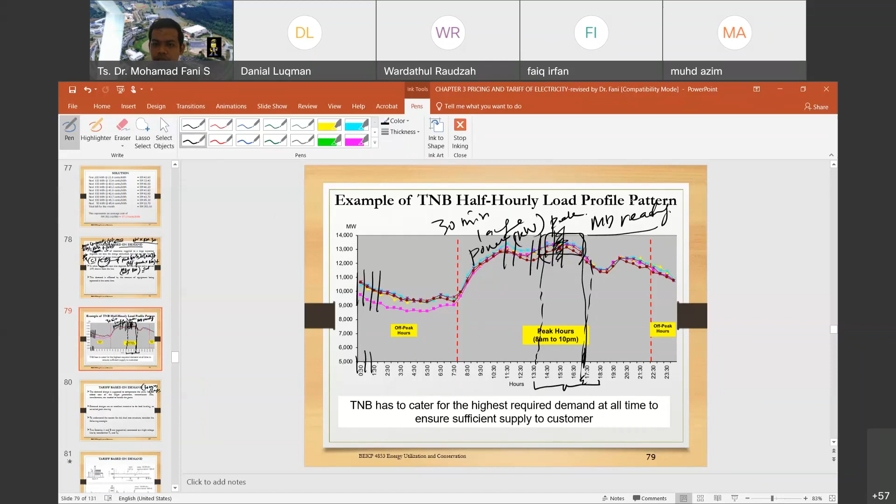So demand charge is an excellent incentive to do the load leveling, or so-called peak shaving, and will be one of the price signals from the utility to the consumer. So the utility will offer some kind of demand incentive if the consumer can reduce the maximum demand.

So the strategy so-called peak shaving is introduced by many practitioners in the industry, and also you can find it throughout the papers or research journals around the world. So they use peak shaving and also peak clipping, okay, peak clipping, to mitigate the maximum demand

value, the maximum value. For example, here we have something like this, 24 hours, okay. So this one is the area for peak. So on how to reduce this peak demand, there are many initiatives that you can do. For example, if this area is within the lunch hour, you can put a strategy to reduce the maximum demand during this lunch hour.

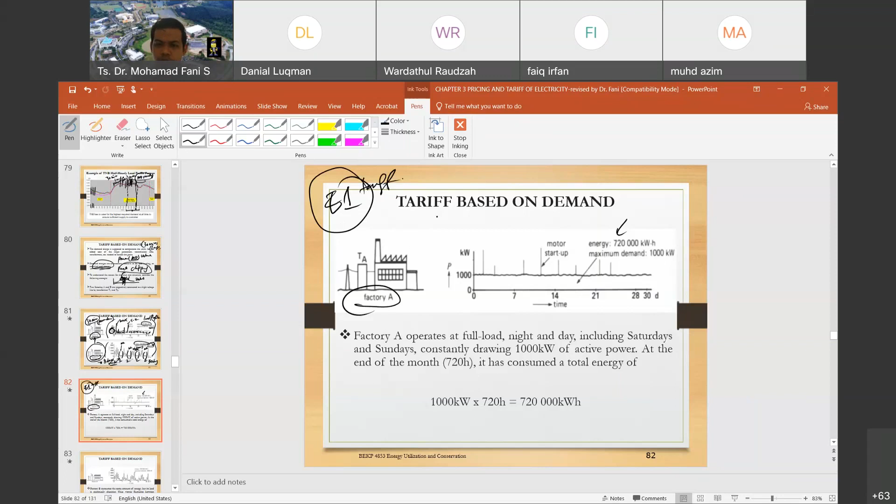So by this way, this one is how they get the kilowatt hour for factory A, okay. So let's calculate the tariff for factory A. Let's consider that factory A uses the E1 tariff. So what's the electricity cost for factory A?

So let's refer to yesterday. I did mention the many types of tariffs. So you can refer to E1. So E1, what's the price for the maximum demand?

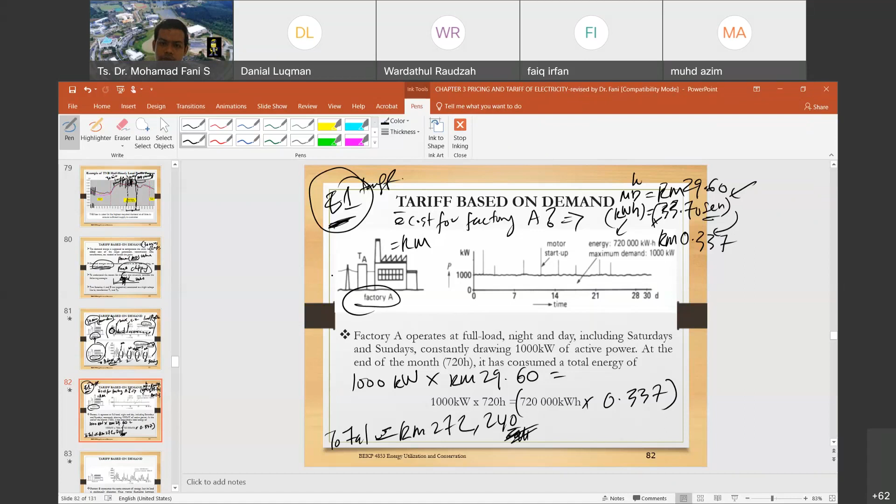So let's consider the tariff for factory B using E1 as well. Calculate 720,000 kilowatt hour multiply with RM0.337. This one is for energy consumption, and for maximum demand 3000.

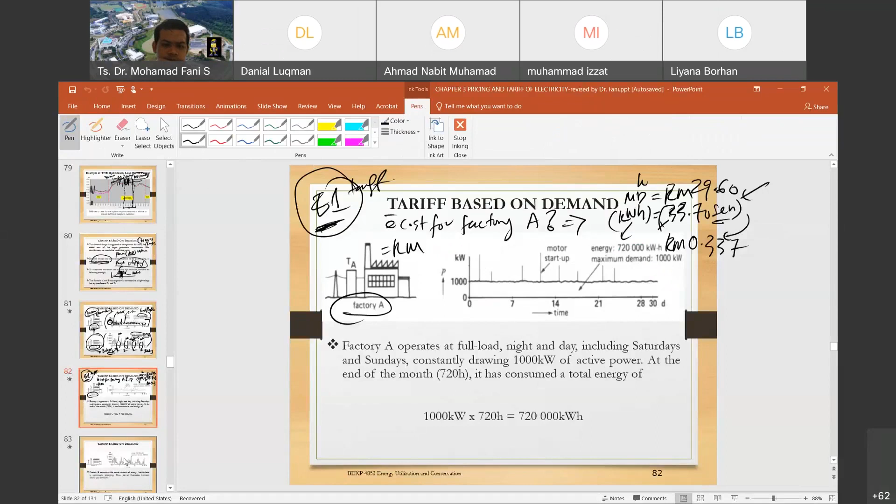Factory B, how much? This one multiply with 0.337. This one 29.60 RM. So plus both of them, you get the final RM how much? 331,440. This one is the total bill if they use the E1 tariff.

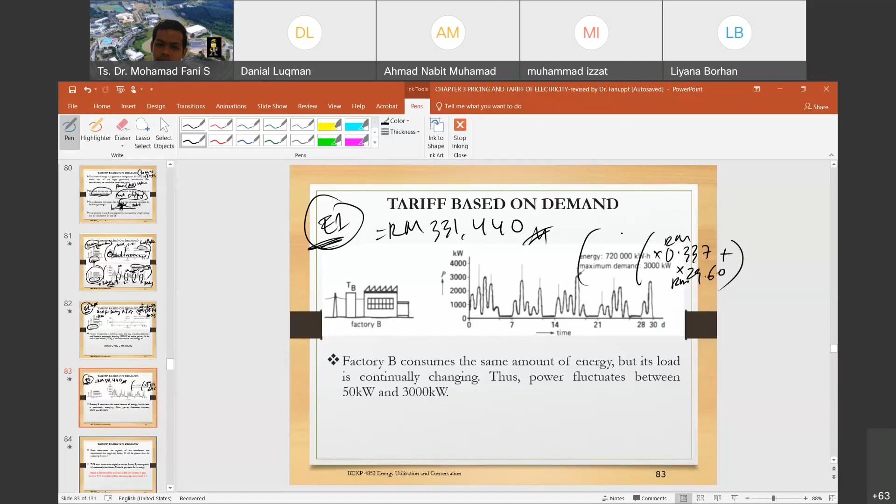So we know that when the maximum demand is higher, it reflects in a higher total energy cost for the monthly electricity bill. So when factory B is compared to factory A, we know that factory B consumes the same energy but a different amount of maximum demand, and factory B's electricity cost is higher compared to factory A. Okay.

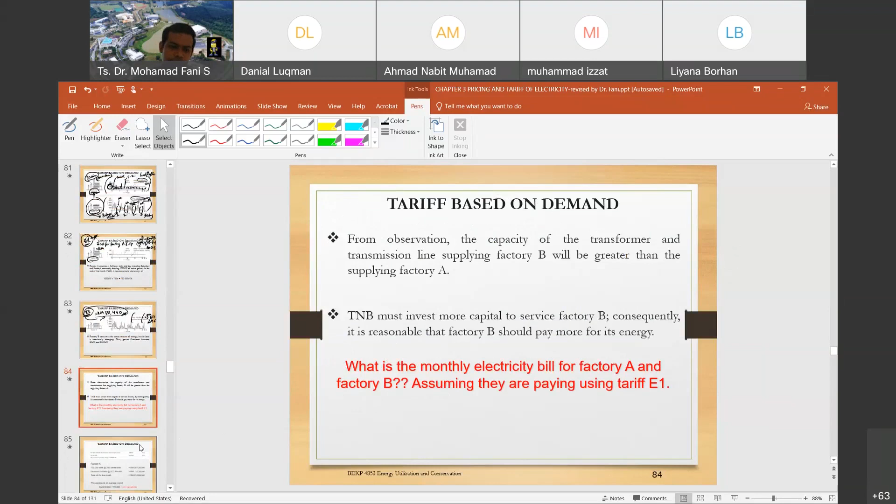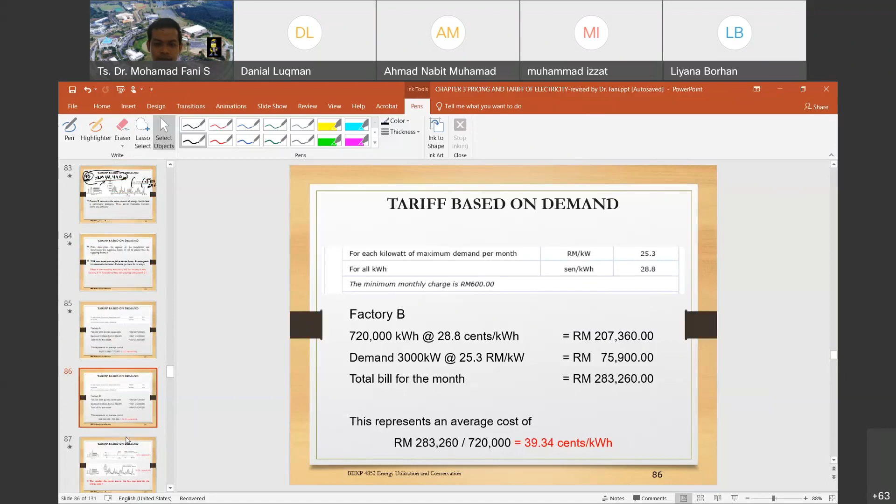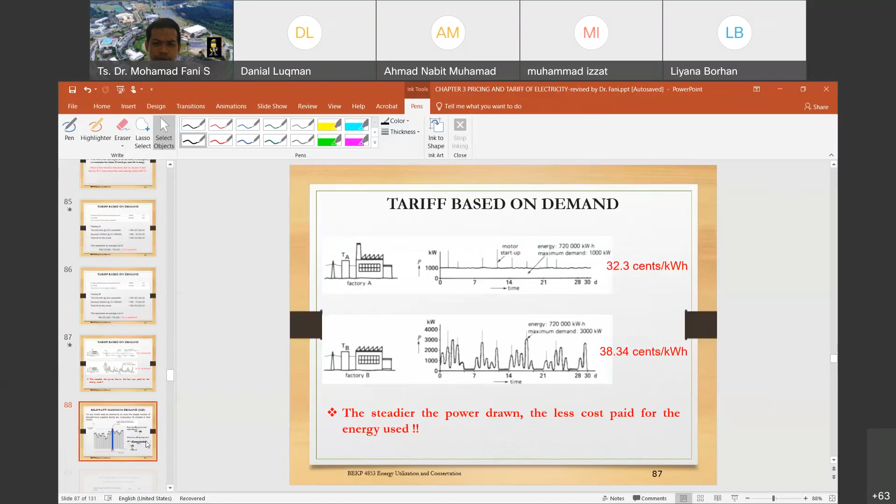One, you can consider peak demand for the fluctuating one, okay, that is less than 30 minutes, but the large number of the power used within the 30 minutes or consecutive 30 minutes, okay, that one we can consider as the maximum demand.

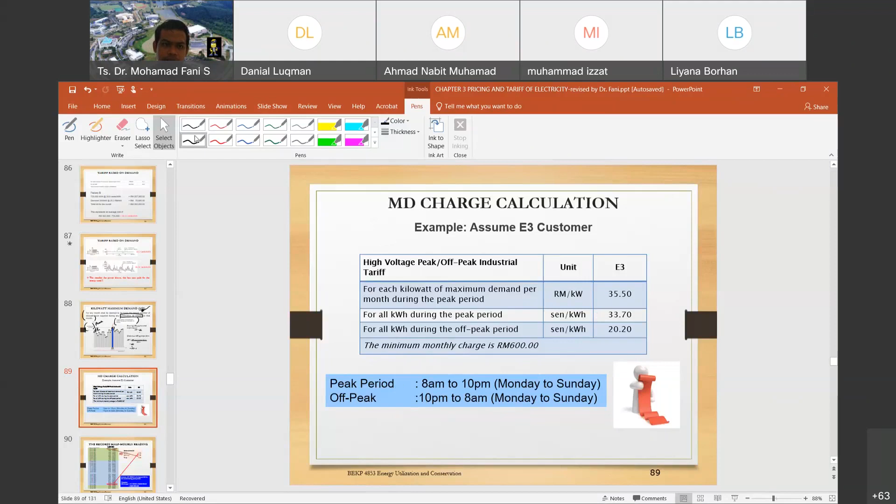Okay, maximum demand calculation for this one, E3, that uses E3, okay, the peak period. This one is the case example. Assume E3 customer. Okay, this one is the January load profile, 2nd January, okay, for 1 day. 1 day or 24 hours.

So we assume that this value, the top value of the power demand here is 71,700 kilowatt. Is the highest MD for the month during the peak period. Even though we found that the highest power drawn in these 24 hours by this manufacturing is 73,370 kilowatt, we cannot consider it to be maximum demand. Okay, the maximum demand will be picked up from the peak period only.

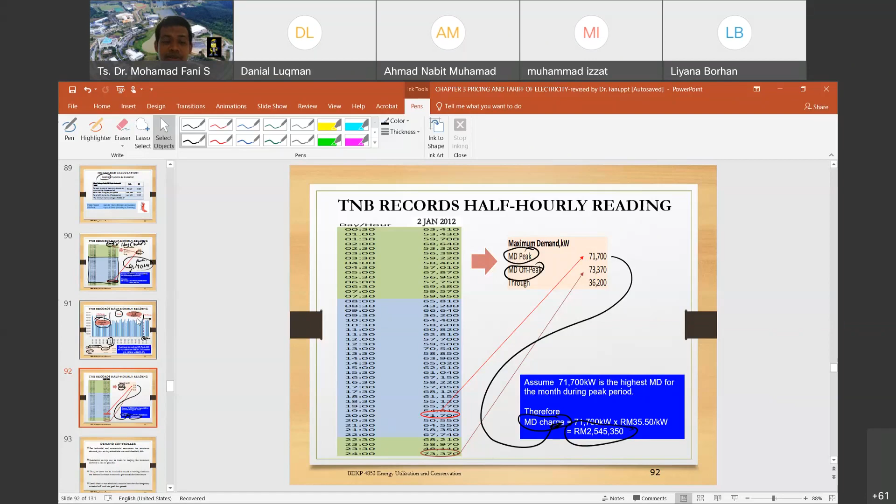And from my experience, I got to deal with a large manufacturer, a solar panel producer. They consume energy in large amounts, and their monthly electricity bill, if I'm not mistaken, was close to 10 million every month. 10 million, you know, can you imagine the large operation costs to maintain the manufacturing? And of course, I believe that their profit is also very large to cover their operation.

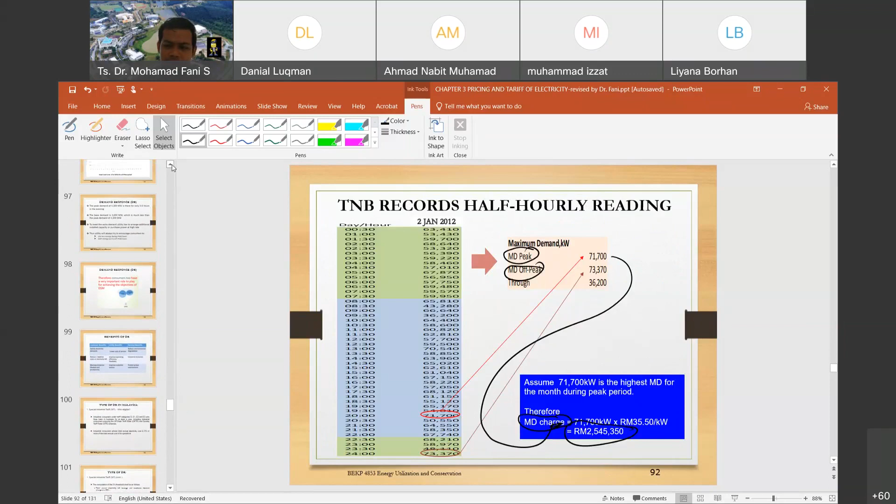Okay, demand control. So what we can do to control the demand, maybe you can have some idea on how to sustain the energy consumption by applying energy efficient appliances or solutions. And also for the maximum demand, frequently in industry, they monitor the demand as well, to lower down the maximum demand. For example, an alarm can be installed to sound a warning whenever the demand is about to exceed a pre-established maximum demand.

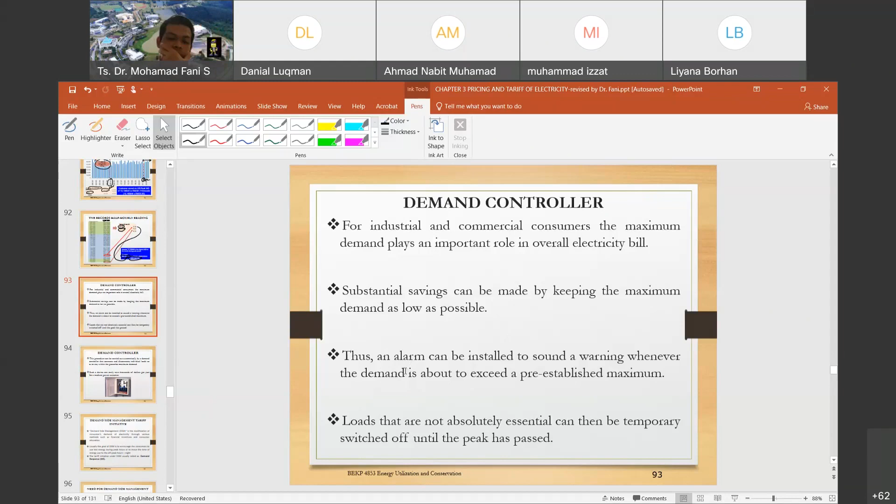From the building management system or building automation system, you can put some kind of indicator to monitor the maximum demand. Okay, for example, you can put a controller to prompt the alarm when it is close to the set point of the maximum demand. For example, 10,000 kilowatt you set as the set point. Okay, so when the load or power you use gets close to 10,000 kilowatt, for example.

So an alarm, the sound of an alarm, will be prompted from that system. So the operator will know, okay, something is wrong with the load right now, and must do something with the operation. So you can manage to look around the operation, okay, and to have some idea what kind of machineries or devices really need to be shut down during that time.

So that's good to monitor, and maybe you can have some idea later on, okay, to do a research, or to produce another technology that easily controls the maximum demand without disturbing the operation. That one is really important to avoid disturbing the operation to produce the output, and to optimize the operation within the limitation of maximum demand.

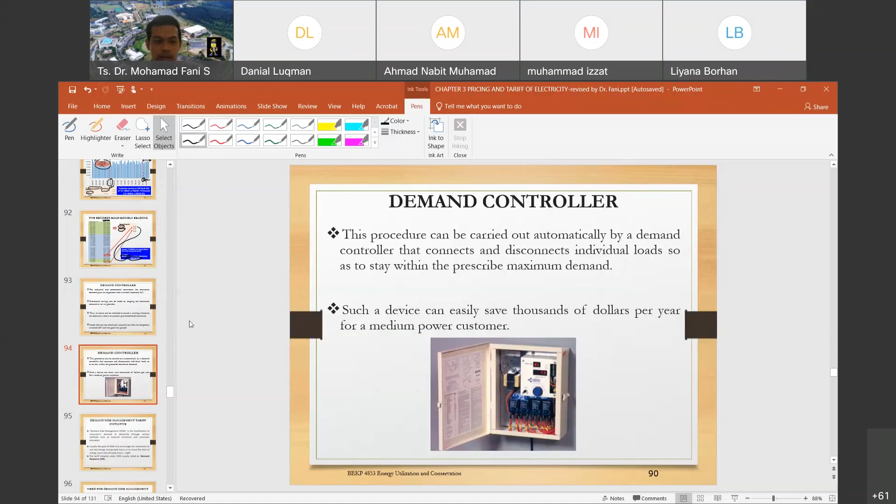Okay, any question before we proceed to the other subtopic, which is demand side management tariff initiative? So hopefully we have covered some topics which are really important on how to calculate the tariff. At least you know the type of tariff and you know how to calculate the total bill from the energy profile, pattern, and also the consideration for the maximum demand.

Any question before we proceed to this other topic in class? No question. Can we proceed? Okay, thank you for your response.

All right, so what is demand side management tariff initiative? Okay, so forget about maximum demand. This one does not really mean the maximum demand just now, but demand side management is the composition of energy efficiency and demand response, which is the program provided to the consumer, for example, to reduce electricity consumption and also to mitigate the peak demand, purposely to reduce the stress on the generation side.

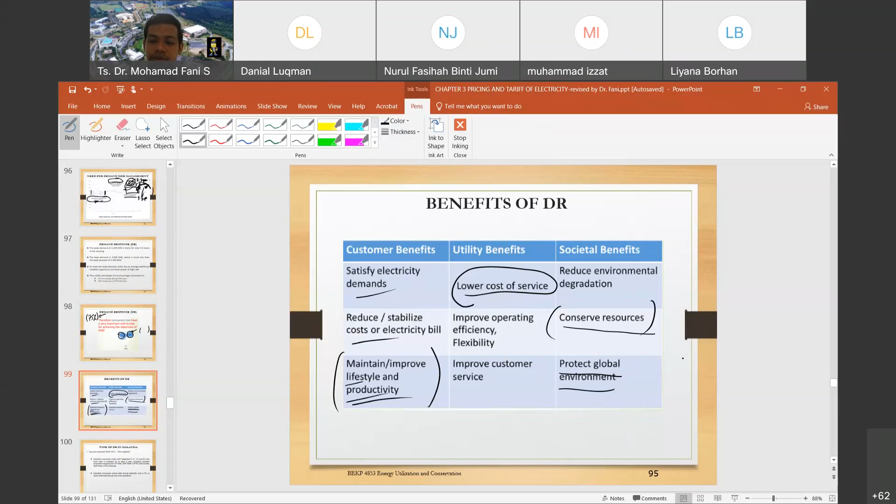So most of the economy, I think, will be established based on this policy later on, and to be a competitor, you need to have better technology and a better price. Reuters also reported that 80% of the solar panels in the US nowadays come from ASEAN countries, and we are one of the largest exporters to the US from many manufacturers here. I think because of the manpower cost, etc., the providers from the US cannot compete with China's products and ASEAN products. So we can produce solar panels at a cheaper price and export to the US as well.

Okay, so about 80% of solar panels installed in the US came from China and also from the ASEAN countries. So the tariff or tax will be revised by the US government. So let us see how this problem will be solved by agreement, the US and China agreement, and also the ASEAN to US agreement. All right.

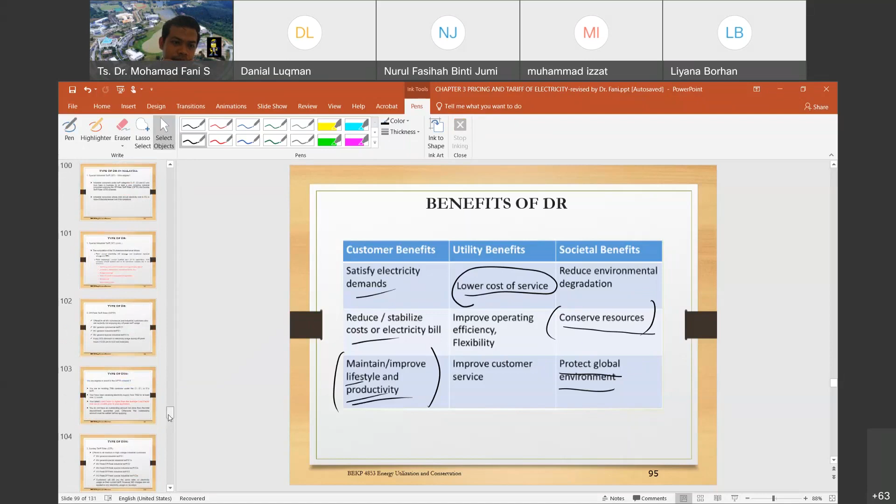Okay, type of DR, this one SIT. SIT dah tak ada. Okay, so do not focus on SIT, but we have OPTR and standard tariff, special industrial tariff, SIT dah tak ada.

Okay, so for the previous one, SIT was introduced to the large power consumer. The process to apply for the SIT, you need to have a good practice for the energy management: to provide energy policy, to appoint the energy manager, and to set the objective for the energy management.

So there were several types of operation that can apply for SIT, and they can have a discount of up to 5% every month for the electricity. This SIT program was stopped by the government for the last 5 years. Okay, industrial consumer, also we have OPTR and also STR, Sunday Tariff Rider.

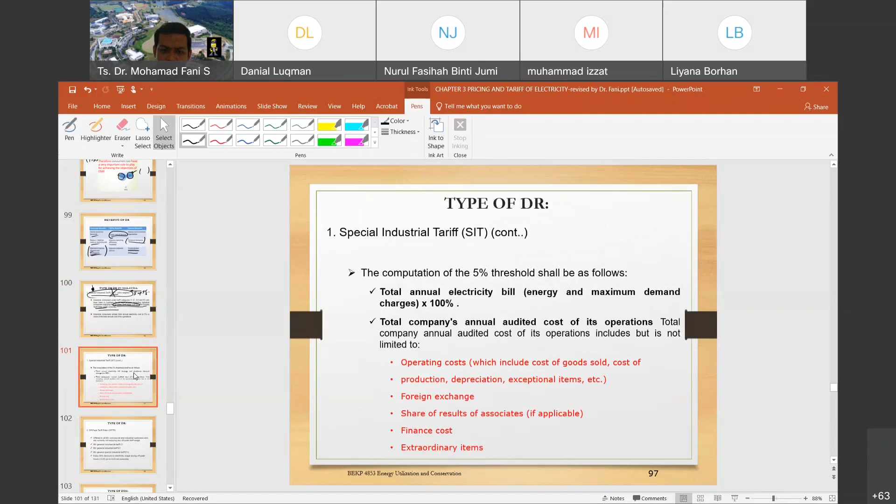Now, this one OPTR, off-peak tariff rider, offered to the MV medium voltage, C1, E1. TNB offers you can enjoy 20% discount on the electricity usage during the off-peak hours from 10 p.m. to 8 a.m. every day if you are able to improve

the point of TNB offering this OPTR, you need to improve the load factor. So you are eligible to enroll in the OPTR if you are a TNB consumer C1, E1, and you have been receiving electricity supply for at least 1 month, and your latest load factor is higher than the average load factor over 6 months prior to the application.

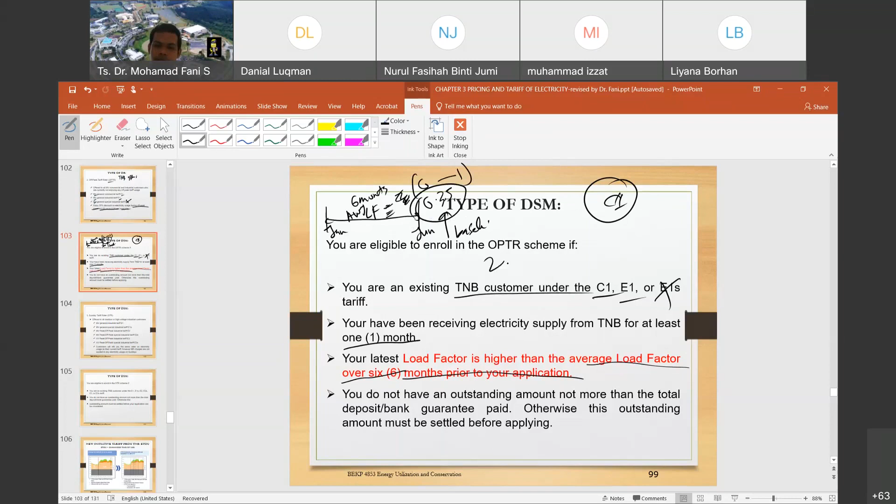So in order to enjoy the 20% discount, you need to improve your load factor. For example, this one is the average load factor given by TNB, and you need to improve this load factor for that month, and you can get the 20% discount for the off-peak during 10 p.m. to 8 a.m. So what's the value? The value of the load factor must be more than 0.35.

So that means you need to have a good consideration for the maximum demand and the energy consumption. So what's meant by the consideration of load factor? This one is the formula for load factor.

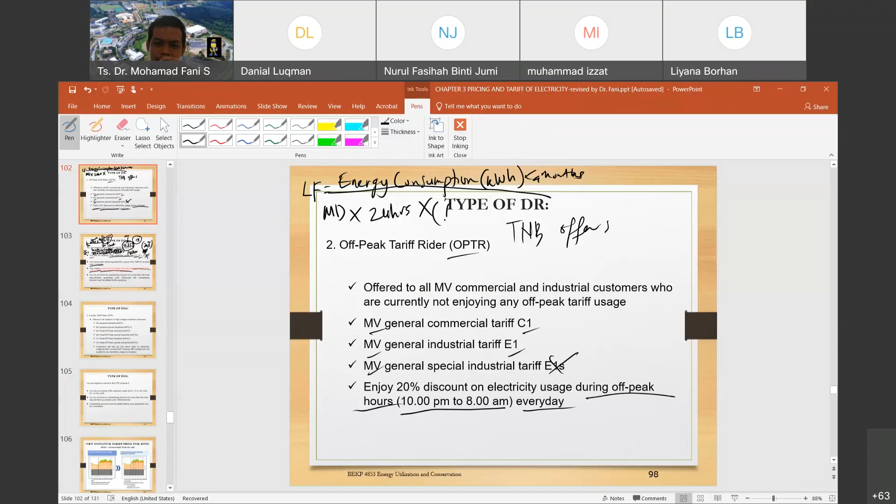Okay, multiply with the hours, 24 hours, multiply with the days in a month. Kalau 30 lah. Kalau Februari 28, consider 28. So this one is the load factor.

So on how to improve the load factor, you can see here. You can maintain the energy consumption, but you need to lower down the value of the maximum demand, so you can improve the load factor. Or you install something to reduce the energy consumption, so your energy consumption reduces, and you need to reduce the maximum demand as well, to balance the consumption and the maximum demand, and of course you can improve the load factor.

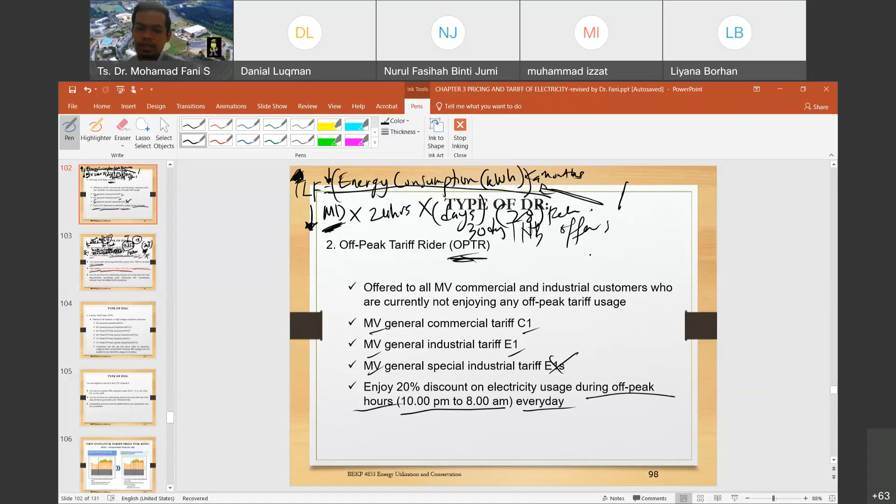So to enjoy the OPTR program, you need to improve the load factor. Every month, TNB will provide you the load factor value from the baseline. If you're able to improve from 0.35 and above, you can enjoy the 20% discount for the off-peak period. Any question?

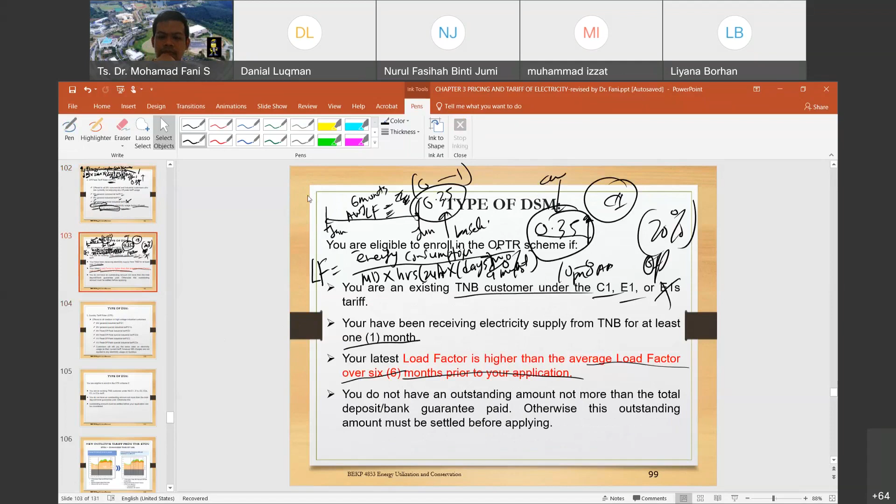No question. Okay, you can proceed to STR. This one's very simple. The consumers that subscribe to this STR offer are all the industrial consumers, E1, E2, and E3. So there's no more special tariff for E1, E2, and E3. Customers will still pay the same rates on electricity usage as their current tariff. However, the maximum demand charge is not applied to any electricity usage on Sundays.

So I think for Johorian companies that operate or manufacture, and also from Kelantan, Kedah, and Terengganu, they can enjoy this because they are working on Sunday, and they can put the maximum operation on Sunday as well. If they have a lot of things to do, they can bring all those things to Sunday, because for the STR, TNB will not consider maximum demand for Sunday. It's one advantage for those states working on Sunday. Okay, so any other question?

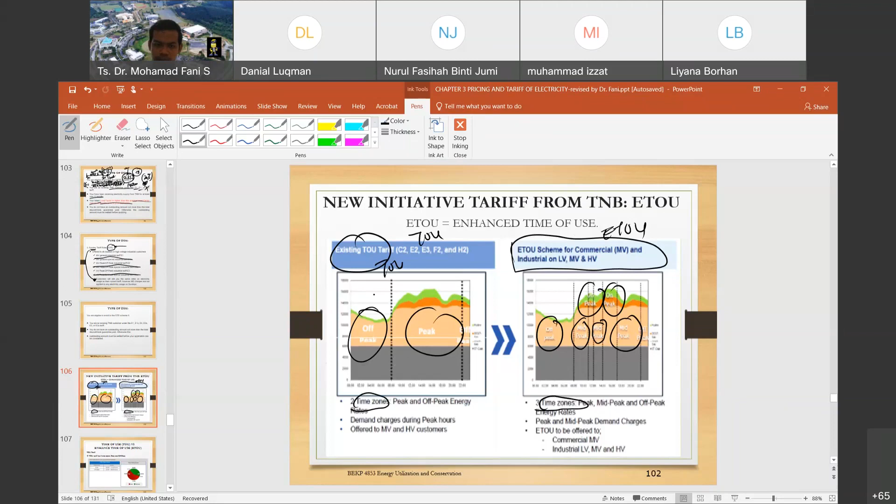You can see here, instead of 2 periods for the TOU, for the ETOU scheme TNB has put mid-peak here. We have peak, off-peak, and also mid-peak. We have 3 zones instead of 2 zones for TOU. For TOU they have only 2 time segments, 1 and 2. But for ETOU, there are 6 time segments provided by TNB: 1, 2, 3, 4, 5, and 6. That's the arrangement of off-peak, mid-peak, peak, mid-peak again, peak again, mid-peak again, and lastly off-peak. 6 time segments.

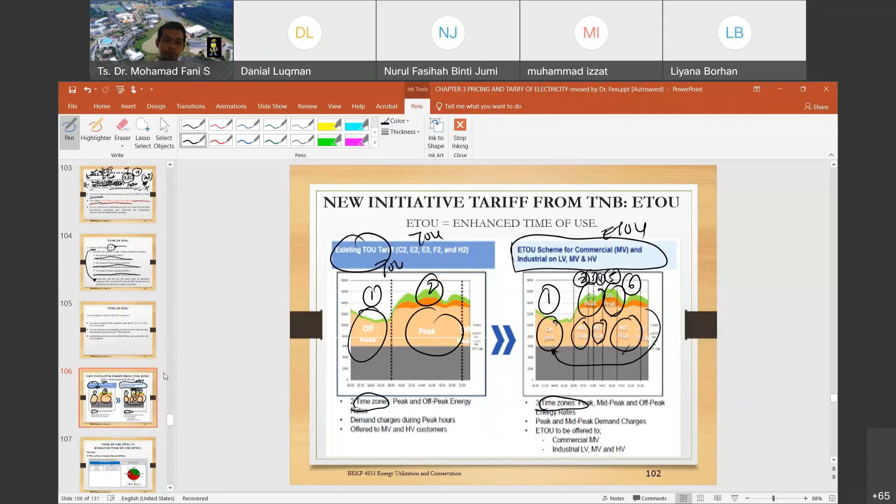So compare TOU and ETOU. Please read more. If you want to understand more about TOU and ETOU, you can refer to the TNB website. Frankly speaking, last year this kind of question was asked in the final examination and also in midterm tests. So please try to understand the difference between time of use and enhanced time of use, ETOU. What I can say here is the time zones are different. For TOU there's only peak and off-peak, but for ETOU they have put a mid-peak zone as an addition to improve the TOU.

Also, ETOU offers an off-peak charge for Saturday, Sunday, and holidays, whereas TOU considers all the days in a month with the same rate. For ETOU, TNB offers off-peak for Saturday, Sunday, and public holidays, and the maximum demand will also not be charged for Saturday, Sunday, and public holidays. For weekdays, TNB offers 6 time segments: off-peak, mid-peak, peak, mid-peak, peak, mid-peak, and lastly off-peak. 6 time segments with 3 zones. Okay, and this is the time offered.

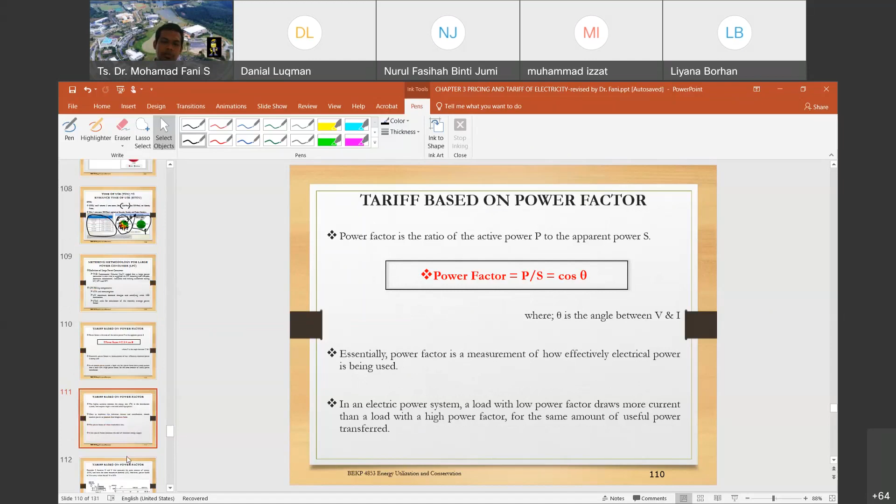Large power consumer, LPC billing, TNB definition. Power factor. This is another part, but I think in year 2 you have learned about the power factor. What is the power factor? Effectively, you know how to get the power factor. To consider the power factor, consider 2 factories X and Y. Power factor is one of the important additional components charged by TNB if the consumer cannot achieve the standard power factor, for example 0.85, or for large consumers 0.9, because a low power factor will disturb the TNB system, especially in transferring real power to other consumers.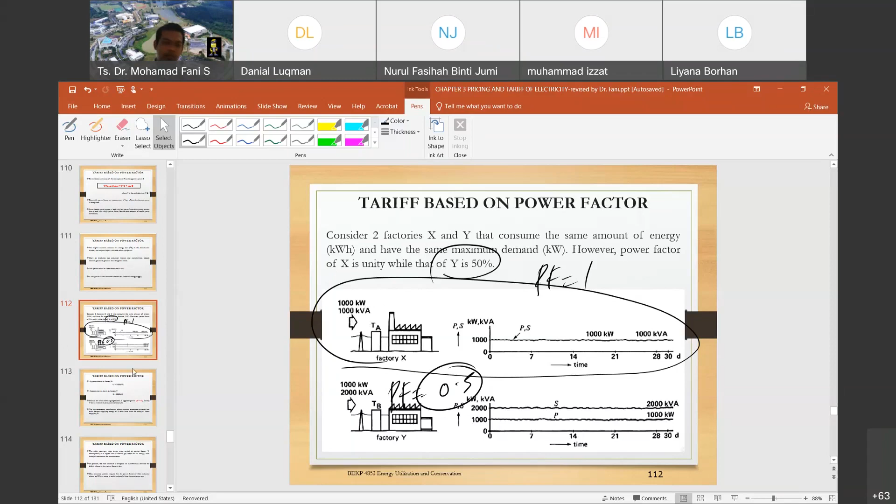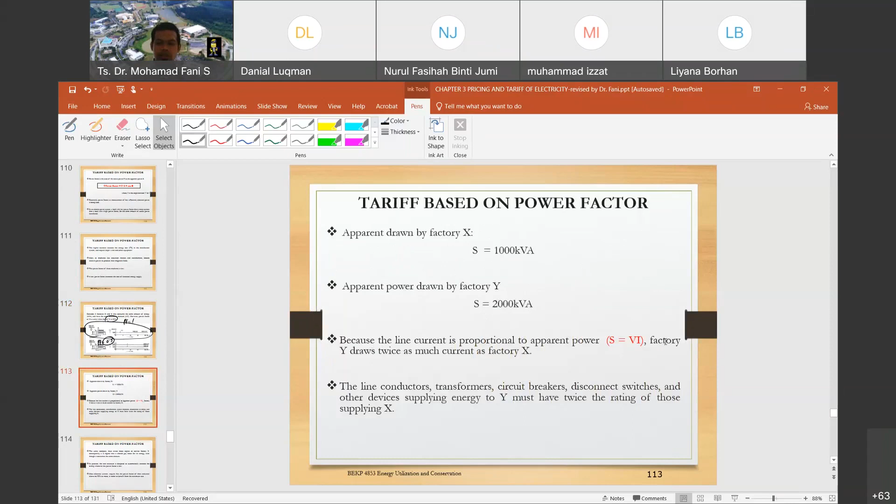So let's see this one. Consider 2 factories X and Y that consume the same amount of energy in kilowatt hours and have the same maximum demand. However, the power factor of X is unity while that of Y is only 50%. So X doesn't matter, because its power factor equals 1, and Y's is 0.5. So something must be done for power factor improvement, so that the manufacturer will not be charged by the utility. The apparent power drawn is 1000 kVA, and for factory Y 2000 kVA. For most utilities, the power factor must be greater than 0.9. So how to improve? Look at here.

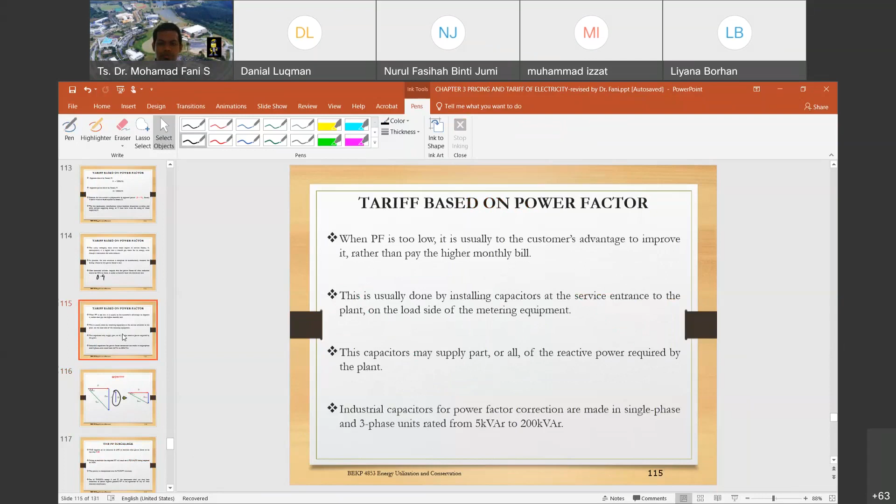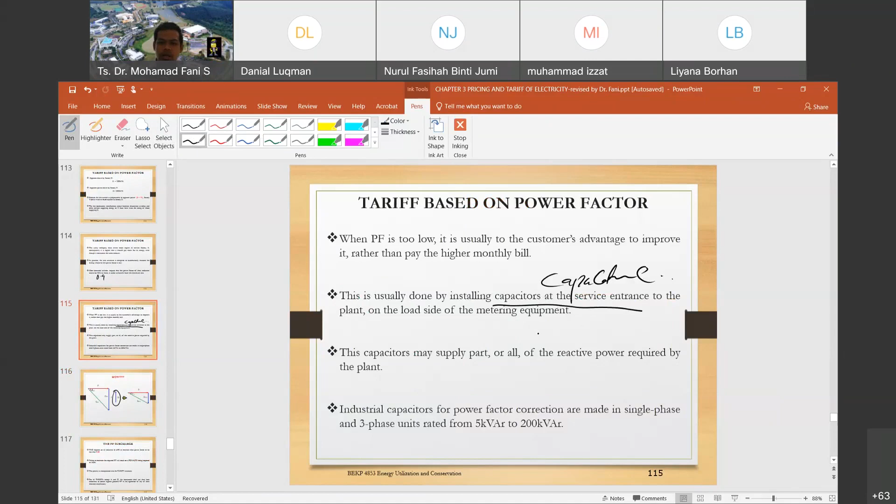This is usually done by installing capacitors, so we put a capacitive load instead of a reactive load. We know that when the power factor is lower, the reactive load is a major load. The type of load is from the reactive load, and we need to put the capacitor. So install the capacitor bank, for example, at the service entrance to the plant and on the load side of the metering equipment. This capacitor may supply part or all of the reactive power required by a plant.

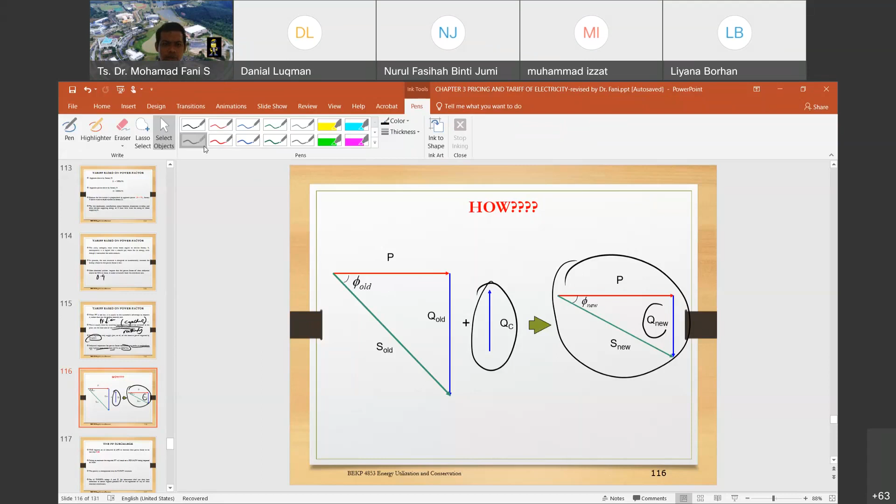Industrial capacitors for power factor correction are made in single phase or three phase units rated from 5 kVAR to 200 kVAR. So the new one will be something like this because we have removed the reactive power. Putting the capacitor can reduce what we call the reactive load.

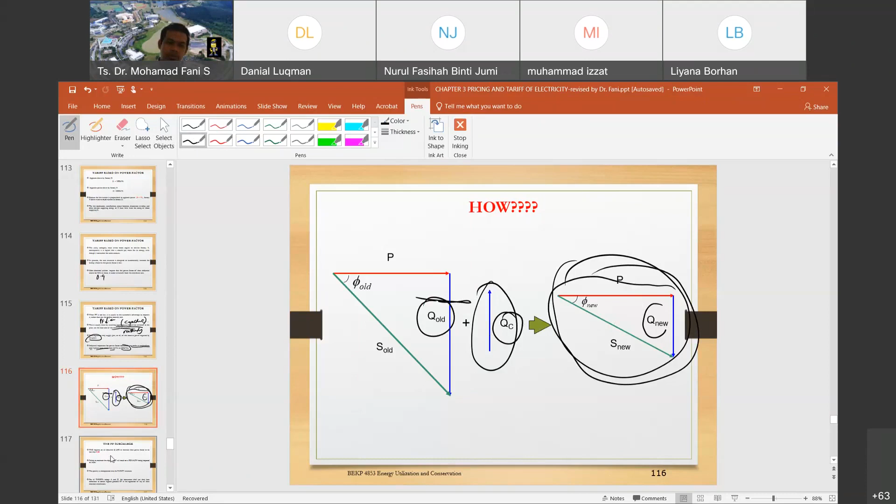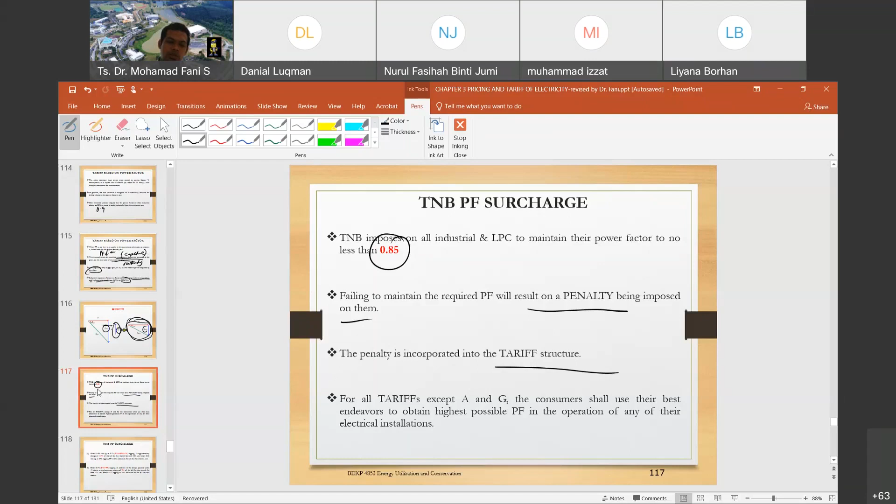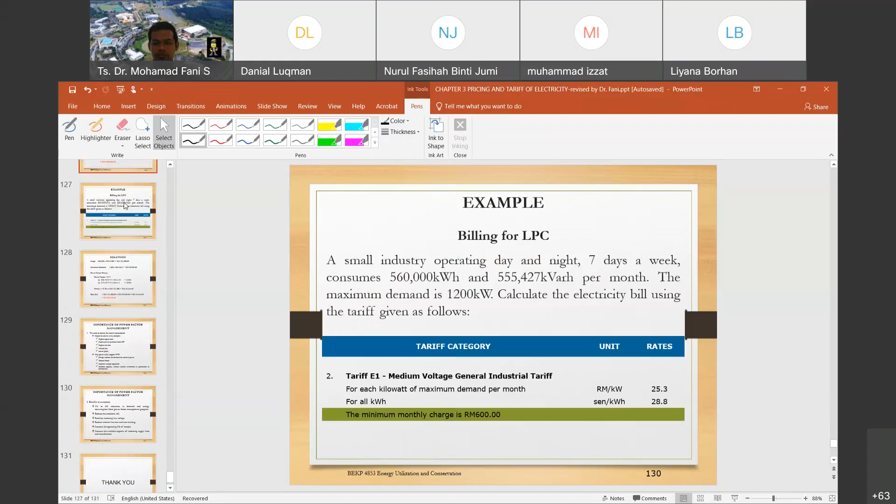So TNB imposes on all industry and large power consumers to maintain the power factor at no less than 0.85. Failure to achieve that number, a penalty will be imposed on the consumer. The penalty is incorporated into the tariff structure and will be counted as a cost in the electricity bill. So let's calculate the penalty for the power factor.

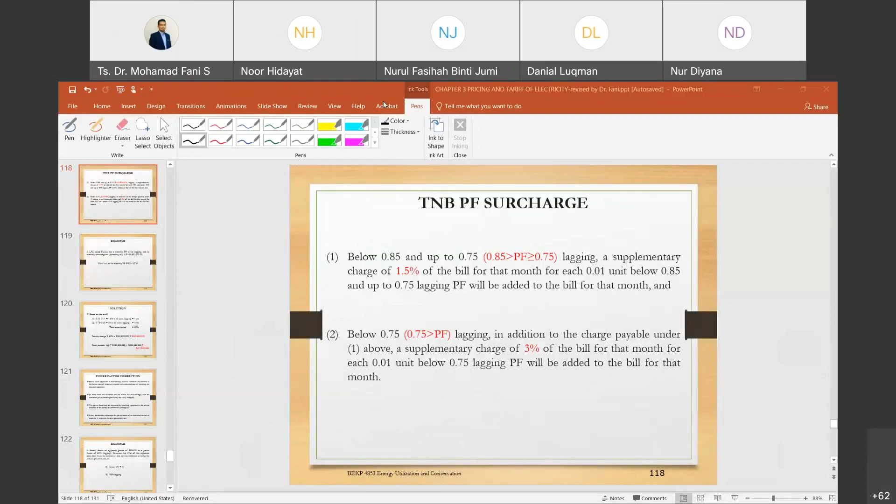Okay, let's continue our class. At least it will take about 20 minutes. Bye-bye.

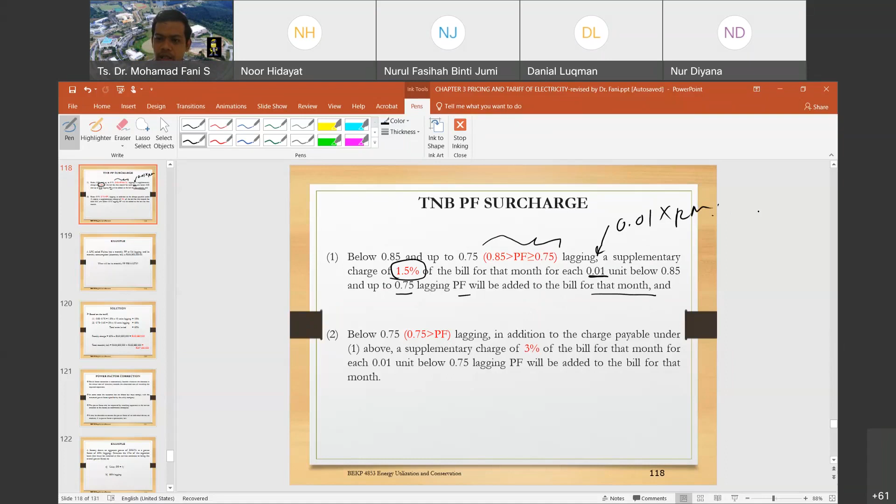All right, TNB power factor surcharge. There are two conditions for the TNB surcharge for power factor, especially for large energy consumers. Below 0.85 and down to 0.75: within this range, a supplementary charge of 1.5% of the bill for that month for each 0.01 unit below 0.85 to 0.75 lagging power factor will be added to the bill for the month. So 0.01 multiplied with the surcharge will be imposed if the consumer draws a power factor below 0.85 to 0.75.

And the other condition applies if the power factor is below 0.75. Let's say the power factor drawn by manufacturing A is around 0.5. So both conditions will be imposed for manufacturing A. Below 0.75, in addition to the charge payable under clause one, a supplementary charge of 3%, two times clause number one, for every single 0.01 unit below 0.75. All of this will be added to the monthly bill.

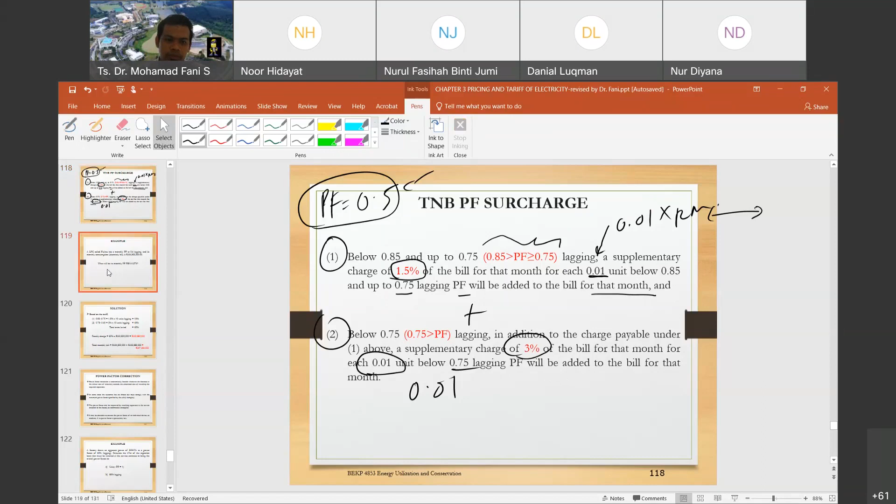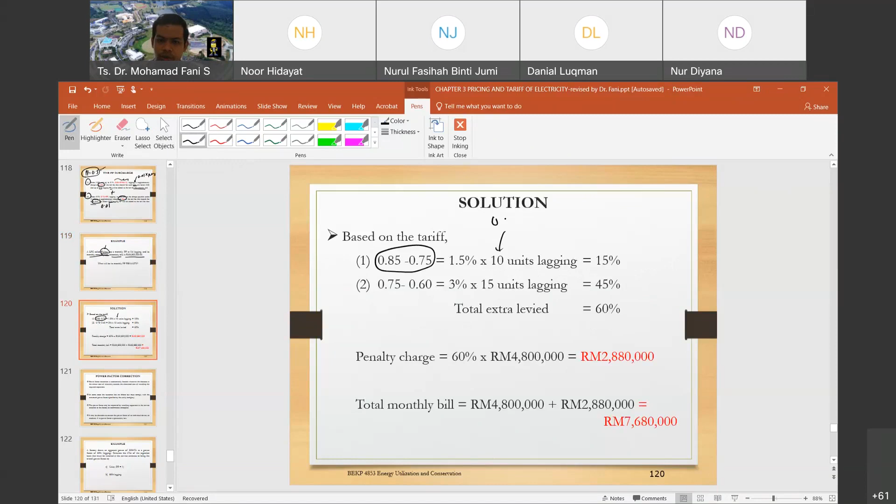How to calculate? We know the power factor of 0.6 lagging does not meet the standard set by ST or TNB. From 0.85 minus 0.75, that's 10 units of 0.01. So for clause number one, 10 units multiplied by 1.5% equals 15%. For clause number two, between 0.75 and 0.6, the power factor reading for Fujitsu, 3% will be imposed: 3% multiplied by 15 units of 0.01, which is 45%. So the total percentage is approximately 60%.

The penalty charge will be based on 60% multiplied by the total cost of electricity, its monthly electricity bill. So the power factor charge is near 3 million. See, a very expensive charge by TNB. If you draw a lower power factor, you can be charged every single month about 3 million, close to the total electricity bill.

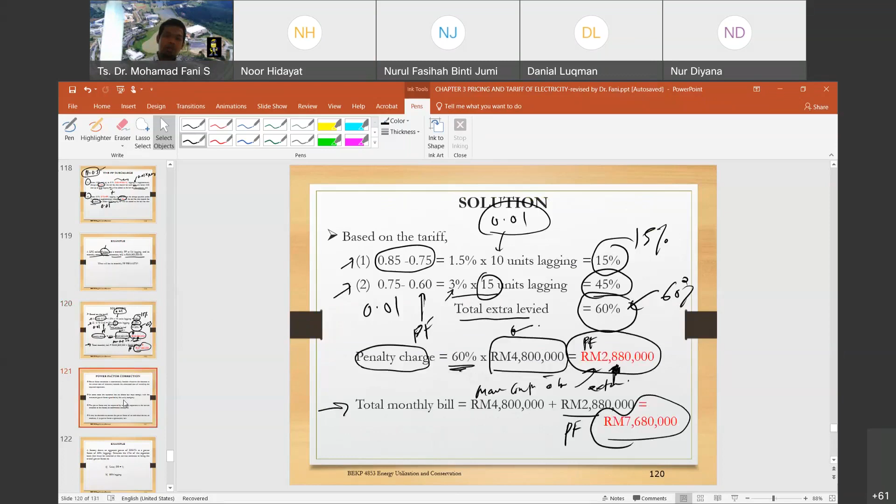So that one is from my own experience. During the pandemic, most buildings that installed large solar generation, for example, faced the same problem with the power factor charged by TNB.

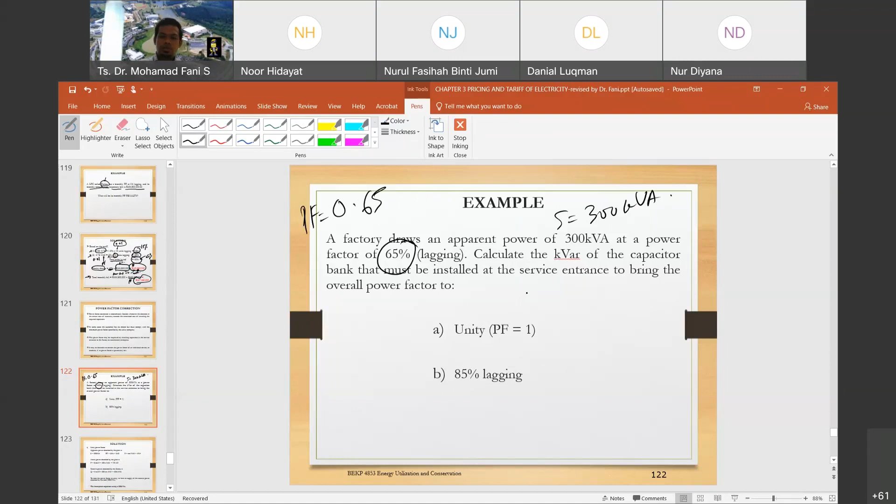So let's do the example on how we can install the capacitor bank. Okay, what's the sizing of the capacitor bank that is appropriate to improve the power factor. So now the power factor for this factory is 65% or 0.65. Okay. So the apparent power S is 300 kVA, okay, the power factor. So we need to have the Q1, kVAR.

And at this power factor, calculate the kVAR of the capacitor bank that must be installed at the service entrance to bring the overall power factor to unity, in order to improve to unity, and also to bring it to 0 point... sorry, again. Okay.

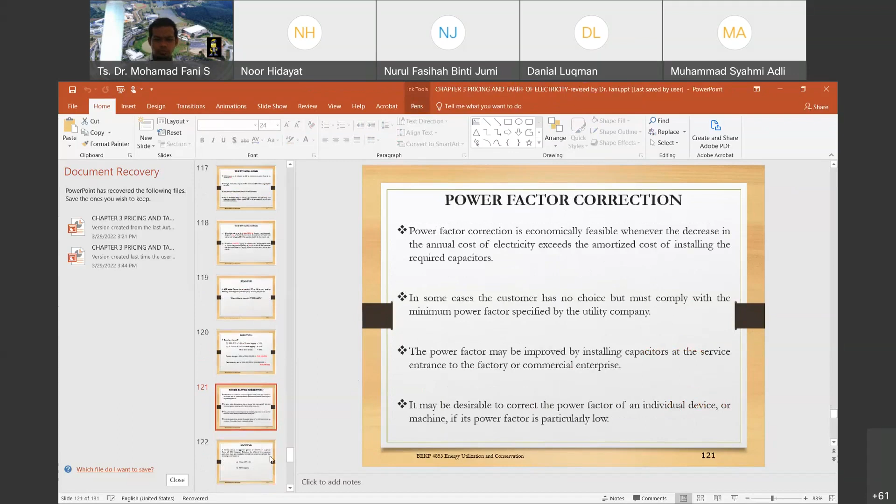Okay. So let's, as usual. So this one is the last task for you to submit for today. Okay. You can see these examples. Okay. But let's do some cases. Case one, this one, case A.